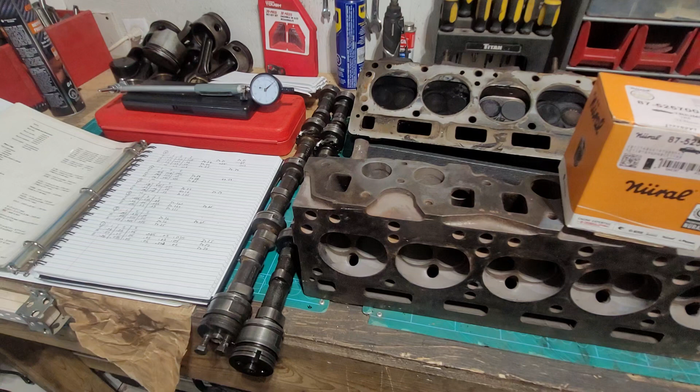Today's video: TR6 engine cylinder bore measuring theory. Yeah, that's a long one. Anyway, this is not one of the normal videos I do. This one is something to throw out there to the Triumph community, basically I'm looking for opinions.

Normally we measure the cylinders the same sort of way to see if it's out of shape and so on. However, what I'm doing now, I have an engine here that's been bugging me because it's at the cusp of being out of size. What doesn't help is that it was also stamped F and not AB.

So it's bugging me because it's pretty much out of size, but at the same time I'm thinking, is it or isn't it? I'm trying to get the exact number because obviously you don't want to machine if it doesn't need it. But don't get me wrong, it's always nice to machine it anyway, but it's a cost thing, let's face it.

Anyway, follow me with this and see what you think. Again, this is something to throw out there for opinions only, to see what people think. There's not a dig at anybody or saying anybody's doing it right or wrong or anything like that. Just make that perfectly clear.

So let's go through the process. I've done my calculations here, and I've actually done it in mil because I have both a mil and a metric gauge. That's how it's been wrecking my brain so much. I've been doing it in both, in metric and in mil, just to see would it end up being the same.

And it could be a little controversy to say. Anyway, let's look at what happens. Okay, so usually what we do, let me zoom in a bit. We take our measurements off a set number.

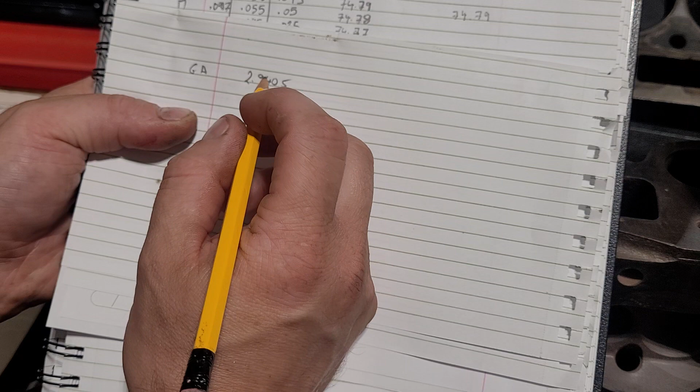And usually when we do a number, so what we'll do is, up here, this is a mil though. When we work out, we start with that, we set our dial gauge to that, and then anything on the dial gauge that's less, which means it's bigger in size, we write that down as discrepancies. When we get discrepancies, we see basically the taper and so on, where our measurements are.

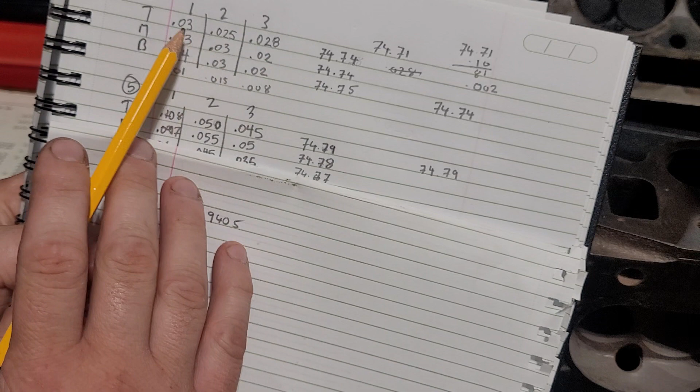I'm not going into all that. And then we find out, we add it all together, take the biggest size, and we basically get a cylinder size. Then we go back to this and compare to see if it's out of size. I mean, do we still have an apple or do we have a lemon?

Anyway, what we normally do is take that 0.1 mil, right? Now, again, there's nothing in the book that says that. So first of all, I'd like to know, even though we use this, who started this? Who started at 0.1 millimeter? It's unofficial in that way because it's not in the book.

Now, I'm not saying it's not in the book - I guarantee it is in the book, we just can't see it. Maybe it's in there but not clearly written.

And maybe it's just a case that when you get to a certain point, like if you think of it like your bearings, when you measure the journals and it gets to a certain point, you go up a journal, or you go up a bearing, but yet you don't machine the journal. Do you know what I mean? The gap has gotten bigger, you don't machine it, but yet you fill in the gap with a bigger bearing. So why are we not doing the same here?

And this is where my train of thought is going. So they say 0.1 mil is the tolerance, right? So based on inches it was 0.0038, but you could say 0.003 to be safe.

And you end up with 2.9443 - yeah, 8, 9, 10, 5. Oh sorry, 3.

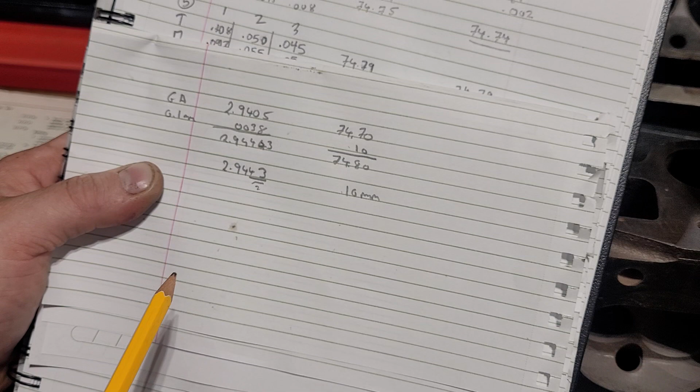Now here's where it started to change for me, is that I'm going to show you the book. Sorry, this pencil's driving me nuts because I need to sharpen it now. I don't have a sharpener here. Here's the book.

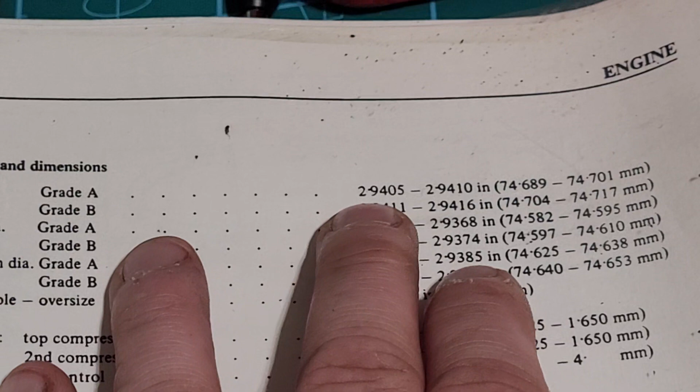Now follow me with this one. We're taking a number off this, 2.9405, right? Or 2.940, just to be sure. And that's the grade A bore piston, the bore size of the piston. If we take our engine, and we take our cylinder, we take our pistons out, and we measure this, and we go through all this process, and it's all within range, that's fine. Everything is going hunky-dory, doesn't need machined.

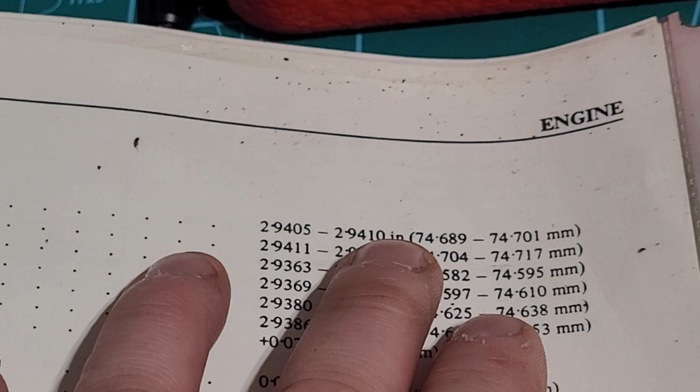So what do we do? We can either clean these up if they're right dimension and these are not worn, which theoretically, if this is within range, then that should be in range because one has to match the other, theoretically. So if these haven't been worn down, you'd expect them to be correct. However, what we can do is do this.

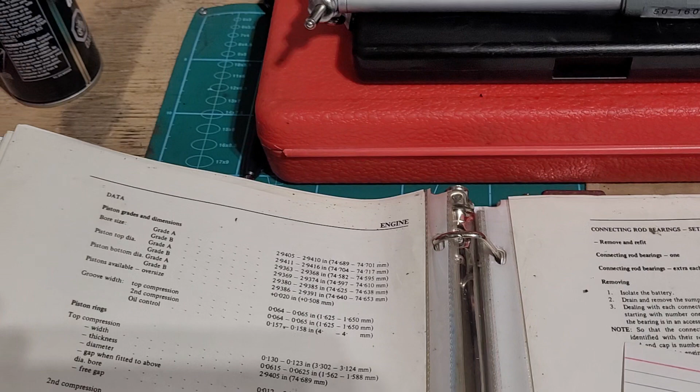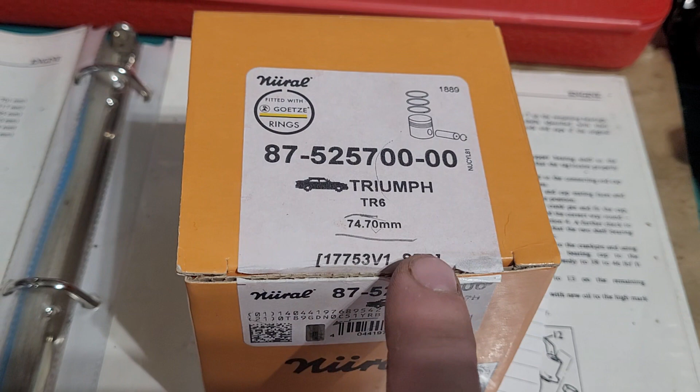We go out and buy a brand new piston. So this is a brand new piston head. As you can see, it's for a standard size, 74.70 mil standard size. All right, still straightforward? Yeah, okay.

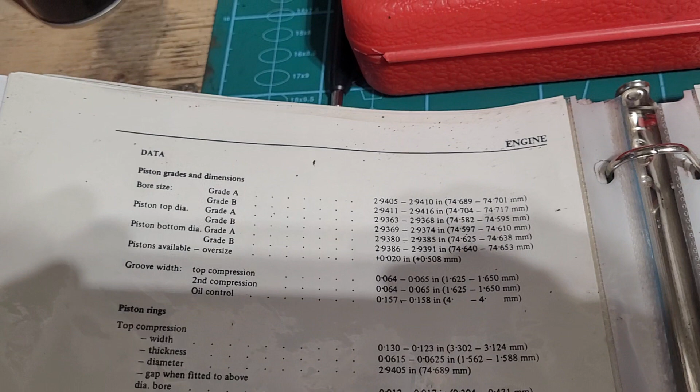Let's move on. Your engine has some grade B ones in there. As you can see, the difference is basically half a thou. So you have half a thou different size for the A, and you have a half a thou different size for the B. The difference between the two is 1/1000th of an inch.

So you take your B out, you measure it. But you measure it from what? Do you measure it from this number? Or are you measuring it from the A number? That's the question. If that was the case, you should be measuring it from this number for the B's to see if it's within tolerance. Let's say you did, let's say you took this number instead, 2.941 and not 2.940.

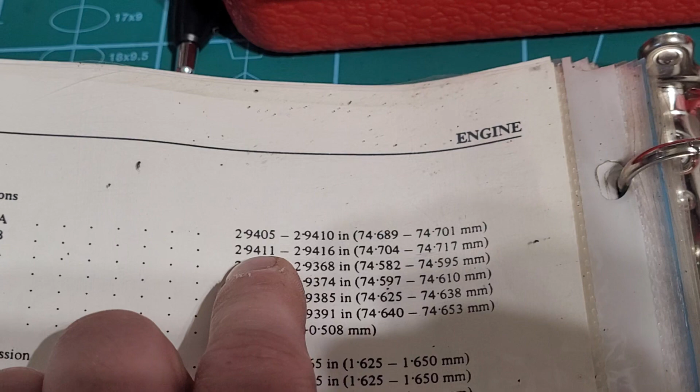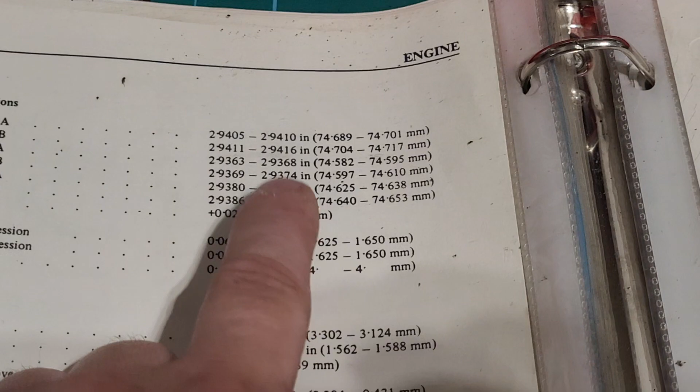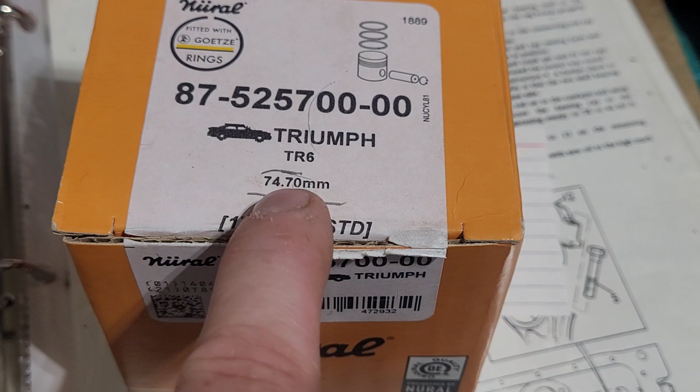And you measured it and you've done the same thing, calculations, and it was within tolerance. So you've done all your numbers, everything matched up. That's fine. You know what? I'll put new pistons in. What do you get? Hey, look, this looks the same. It's the same standard 74.7 mils piston for that. Same piston.

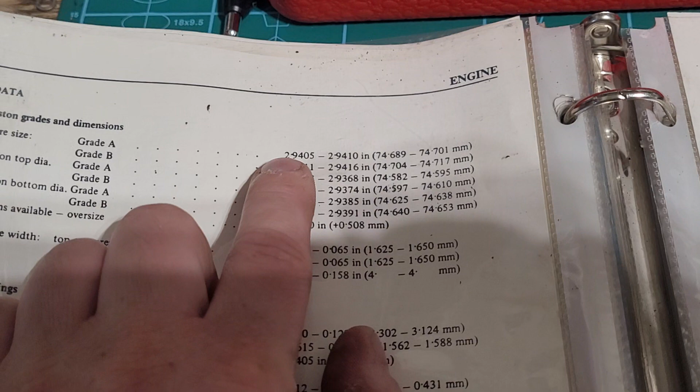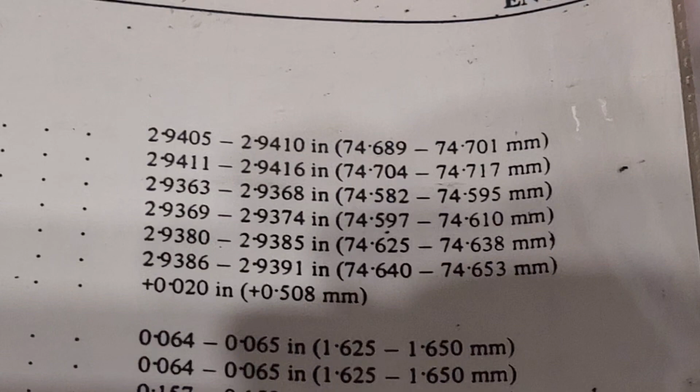Because they're different sizes, and this is what can confuse you, is that if you're using this number for grade B, how do you know this is out of range? Because you're starting off 1/1000th of an inch smaller already, theoretically. When I say theoretically, look at the numbers. This one, you have half a thou between sizes to make sure that this is how it's bored. Straight, no discrepancies, no oval shape, no nothing. This is how it's machined, so it should be perfectly cylindrical. Oh, thank God I said that word.

Between this and this, the same applies for this, between this one and this one. So perfectly cylindrical. So when you're looking for tolerance, or you're looking for wear and tear beyond the norm, what number do you go by? Do you go by the first number or the last number? And this is where I'm going with, is that we normally go by the first number. That's the smallest size. The largest size available for the B is pretty much 1 thou bigger, but yet there's no discrepancies in there. So why are we adding discrepancies onto this number?

For me, this is where I'm thinking, is that the cylinders, no matter which one you pick, they're still within range. So if you were to do your A's, and one of them was larger and out of range, you'd probably bore it. But yeah, for the B, the same cylinder, for the same piston you will put in it, if it's a standard, if you know what I'm saying.

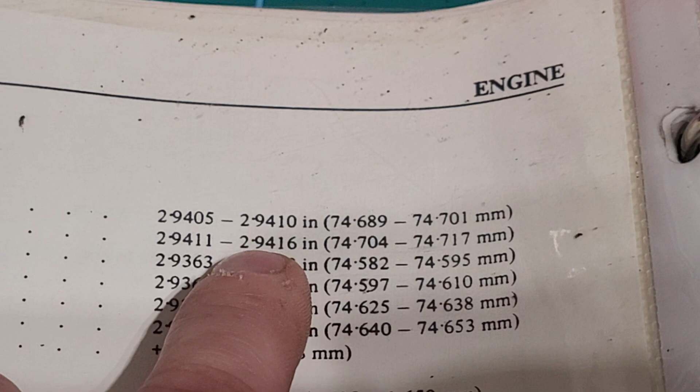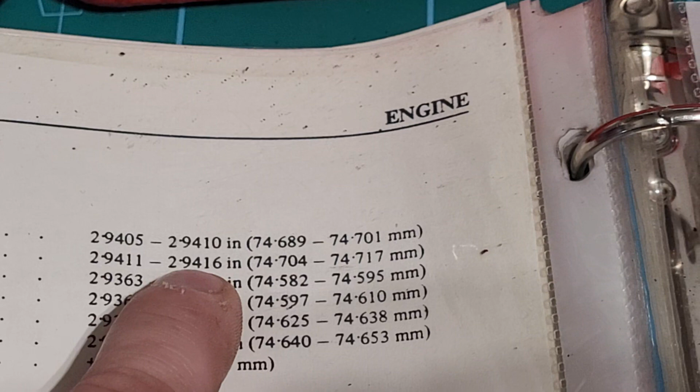So this could be out of range, but still be in range with this. And if it was in range with this, you wouldn't machine it, you'd put a standard piston in. So my train of thought is this: why are we using this number? By right, we should be using this number to start with, a 2.9416, basically 1 thou more. That should be our starting number, because we're using the same piston for both sizes now. You can't get an A and a B, or can you get an F, a G, or an H?

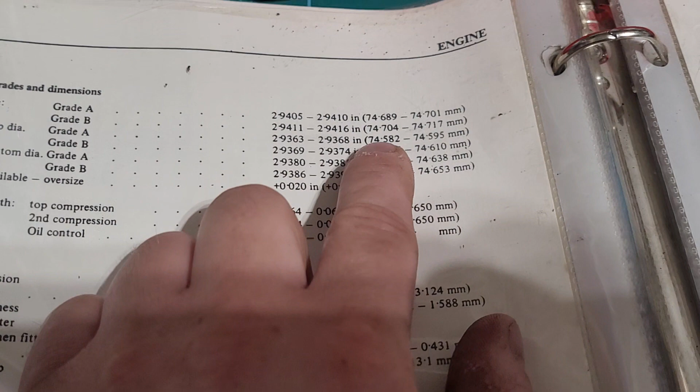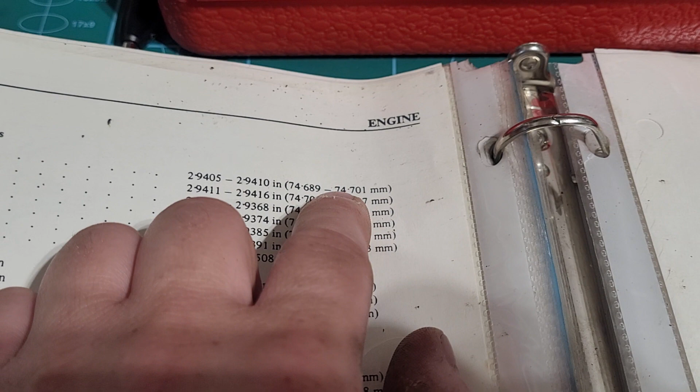You use the same, so the same rule I think should apply for the millimeters. Let me go back again. Same for the millimeters. If you look at it, if you want to do yours in mil, instead of starting off at 74.68 or 74.70, which I'd probably go 74.70 based on the thing. But if you look at it, it's designed for that. It's not giving you the lower number, it's giving you the larger number. But again, if you had this piston, the grade B, it doesn't say 74.71 on that piston, it says 74.70.

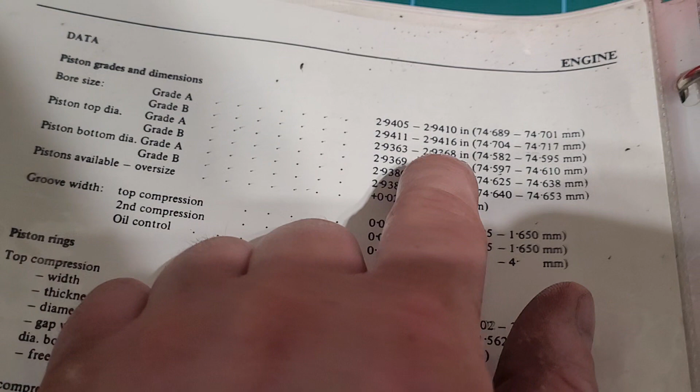So that's what I'm getting at, is how on earth can we measure the grade Bs and still put them in the same categories as the A when there's nearly a thou difference? That's what I'm getting at, and that thou difference is a difference of whether it gets bored or not.

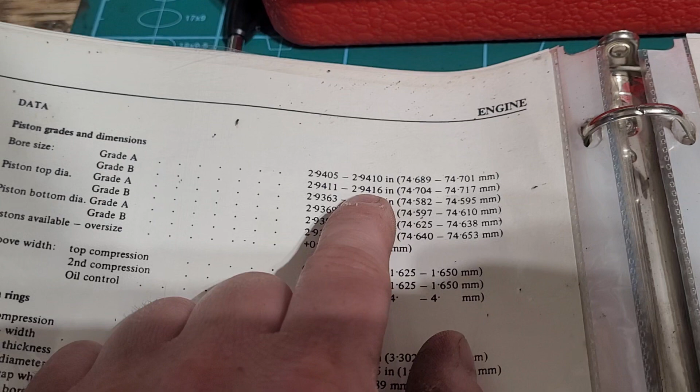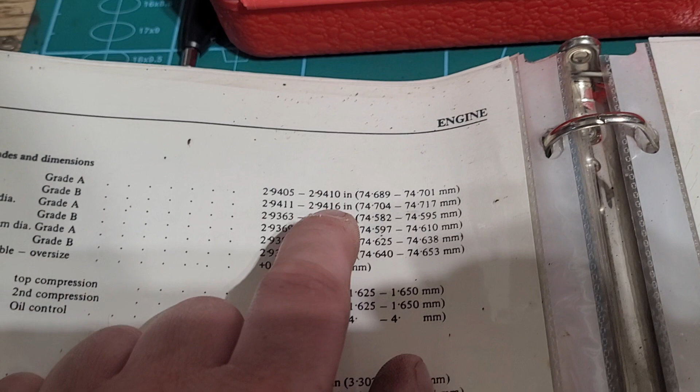So to me, and I'm starting to go this way, instead of using the 2.94, I'm going to start using the 2.9416, or the 2.9415 if you want to call it that, because I can get a 5 on the gauge, I can't get a 6, because I use the digital one. And I'm going to start with that one number, because that's the largest number available with no discrepancies and no wear and tear.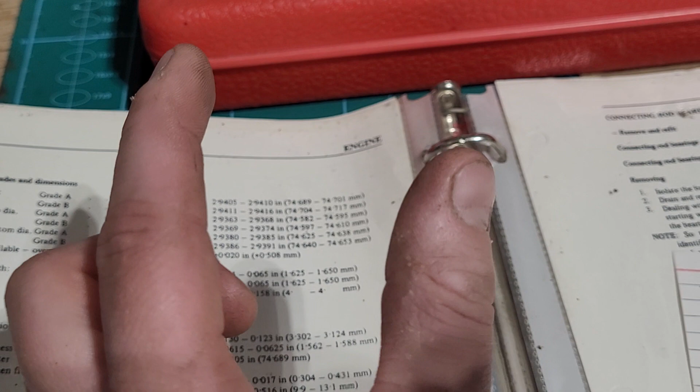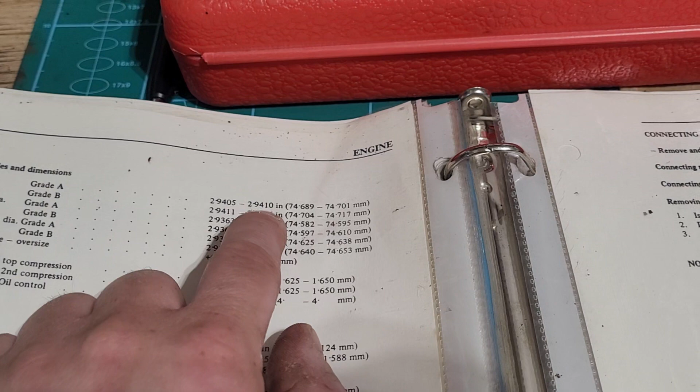Wear and tear, if you have something this size, it starts here and ends here. The wear and tear goes from the end point, not the beginning. That's the beginning, that's the smallest. You're adding in wear and tear into this, that's 1 thou mil, or 1 thou of an inch, your wear and tear that doesn't exist, yet you're adding it in there. And we've all done that, and I have done that. And that's where I'm going with this, is it possible that we're now wrong?

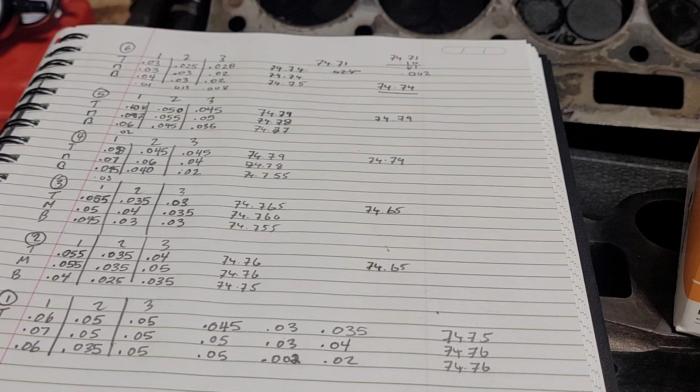Let me show you something else, right? I've got a piece of paper to do this, over here. So let's say we start off, right? We start off with our 2.940, then we add on our 0.0038 thousandth of an inch. No, because if you're not adding that 5, you're not adding that 8, simple as that, would you say? Otherwise you would, because the difference is you end up with 2.943. Well, in this case, if you added on your 5 and you added on your 8, let's say, for the calculation of it, you'd end up with 2.9443. So you've gone from 43 to 44, almost 44 and a half.

That's like, you could literally, to come up with that, you're literally adding half, in reality, half a thou onto this, right? So the maximum, if you want to call it that, is 45. So that gives you basically 5 thousandths of an inch, using that way. Now, that's only going by this 0.1 mil discrepancy.

Since it's not in the book, and I said I've looked through the book and I can't find it. Now when I say I can't find it, I haven't read this thing like a book, I'm terrible for taking information out of books in that way. If somebody actually read it, I guarantee. But who came up with this number? Who? It's not in the book, so somebody had to assemble it. Is it in a different book? Is it in a Haynes book? Is it in a different manual? Like, where did this come from?

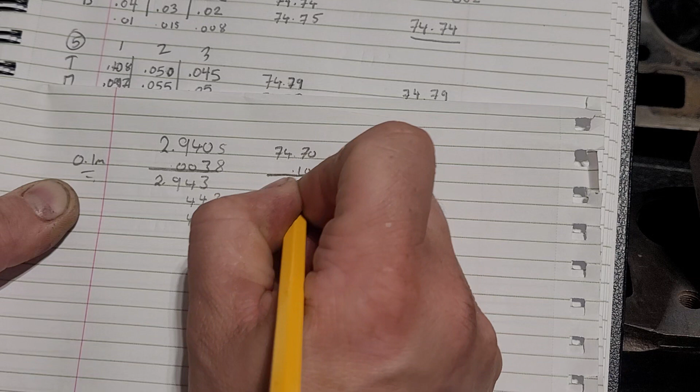This is why, because I want to go into something else and you may explain this. Let's say even we did use this number, that's fine. In mil, you do the same. You do your 74.70, which is based on the piston. I'm going by this number, because that's what it's designed for. And then you add on your 0.10, and you end up with 74.80. Seems pretty straightforward, so anything beyond your 0.10 is out of sync.

So there's your out of sync, and in this case your out of sync is this number. It's actually, well, it's 43, but you could say half, 5 thousandths of an inch, because you've gone from 0.0 to 0.5. So I'd say half a thou, 5 thousandths of an inch, so 0.005.

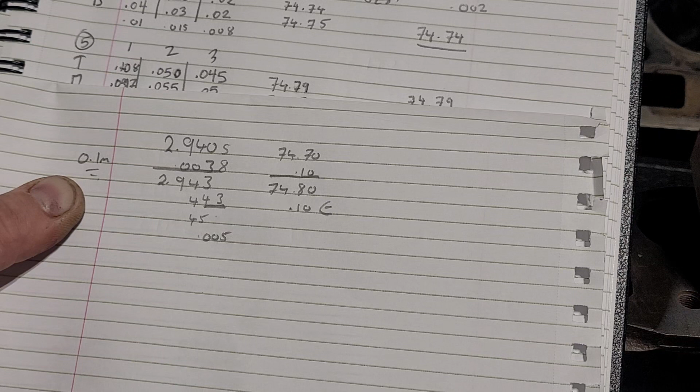Would anyone agree with me on that? Maybe, that's going up a small piece. In reality, it would probably be 0.004, so 4 thousandths of an inch. Anyway, you can see where this is with the numbers, how it goes.

Now what if, though? Once you go beyond that tolerance, it needs to get machined. And you need to go up by 0.020 — 20 thou you need to go up by.

My question is, why is it 20 thou? Why not 10? Yes, you can't get — there's no 10 thou pistons or rings out there. Why? Why is there not? This is where we have to think about it. Somebody else said this, and it never dawned on me when I thought about it — why is there no 10 thou? Why does everything else, like the bearings, start like TR6 at 10?

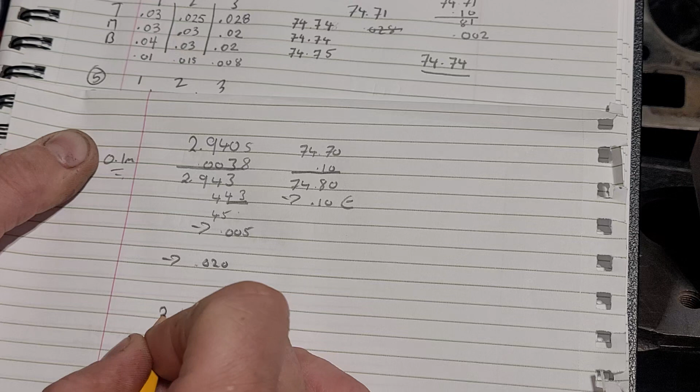So why did these not? Why did these start at 20? Why do you have to go up 20? So I know if you rebore it, you base it off the 2.940, and you'd end up with 960 — sorry, the pencil's terrible.

2.960, but again that's your starting number. So where's the end number? Is the end number — if that was the case, where's your tolerance in here? Where do you get your number before tolerance? Is it 2.96? It should be 2.9605, that's what it would be.

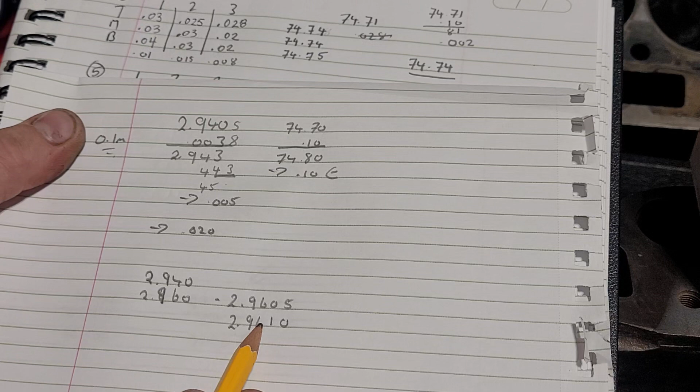Is it 2.9610? Is that the new number you're going for all the pistons? Because that's based on the standard size, which theoretically would be correct. So again, agree with me if you're not — based on boring it, that's where you start, and then they'd all end up the same. There you go. And then, to me, if you'd done that, you'd add a tolerance onto this number, because that's the larger number that's acceptable without any discrepancies.

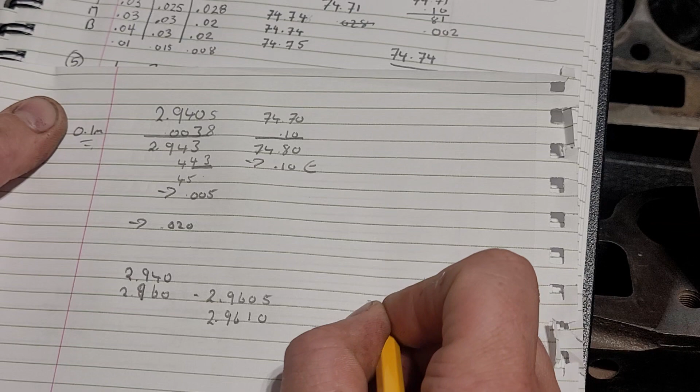However, based on the machine you already have, it includes the grade B. And the grade B goes all the way up to 2.9416. So right now your engine can go this high, this wide, without having any wear and tear. That's how it was machined.

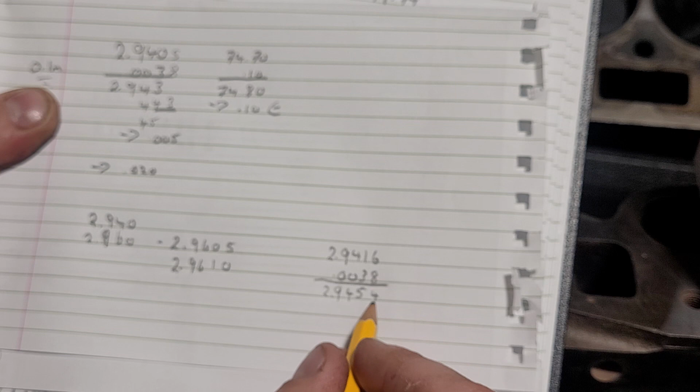So if you add on to that your 0.003 — let's say you're at 0.0038 — you now end up with a number: 2.9454. So it's almost reverse of this one. So now you have pretty much 5.5, your 0.0055 discrepancy. And the reason why this number is a little important is, I know one of Ellen's videos...

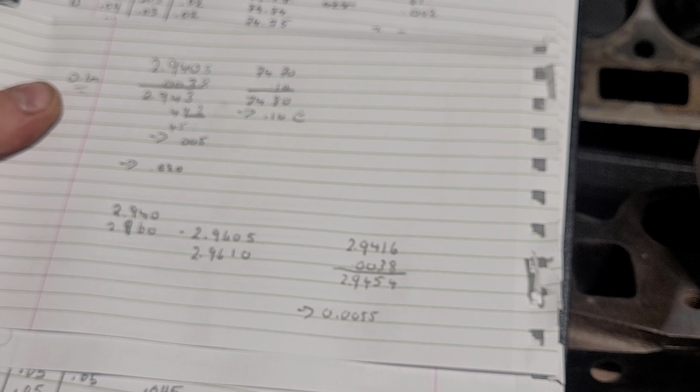On one of his videos, he was doing the machine — it's offhand, I'm trying to think of it — he ended up at like 44. And he's like, 'Oh no, that's out of range, so it has to get machined.' But according to the numbers, if you use it for both A and B — now again, someone might say, well, okay, there were no B's in it, it was all A's.

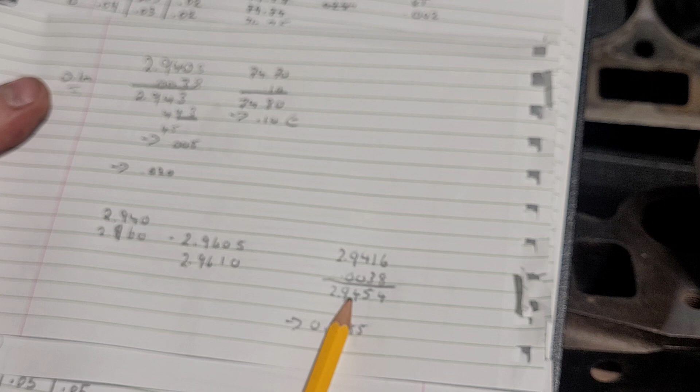That's fine, absolutely fine. But what happens if there's only one B? Once there's one B in it, you have to use this number, because you're going to treat them all the same. This one's going to go into the same one if they're all in range. So you're either going to calculate the B wrong, or you're treating them all the same — you're either calculating this wrong, or they all have to be calculated from that, because the same piston's going into them all. Does that make any sense?

Sorry, it was blurry there. So that's where I'm going with this. Now you do the same with millimeters, so in reality this should be your number. It keeps going out, I don't know why — it will focus. The same for the millimeter.

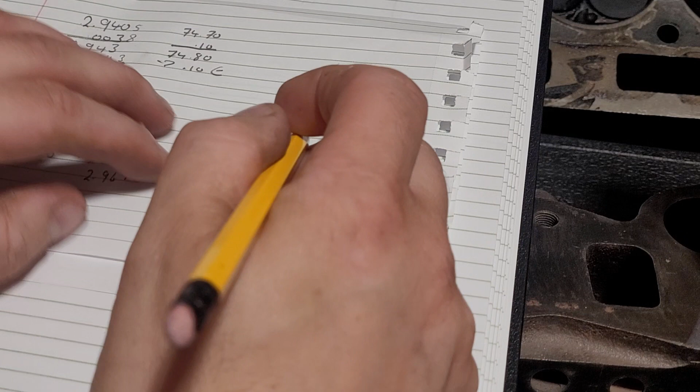74.17. Yeah, I might have to zoom in a bit more so you can see it. 74.17. You add on your 0.10, and now you have

74.27. That should be your size. And when I done mine... sorry, 74, sorry, I wrote the wrong number. My mistake. I was wondering there for a second. Let me do that again.

The millimeters is 74.717. Now I don't know about you, but I can't get that 7 on. If I do millimeters on the gauge, the dial gauge, I can't get that one, or the micrometer, the electronic one. I can't get that. Now you'd probably be able to get that on one of these styles. Hang on, hold on.

I use this one, sorry, it's really close, that's how I use this. I use this one and I put it in inches because I get more numbers and I get a bit more closer. Otherwise I lose the last number.

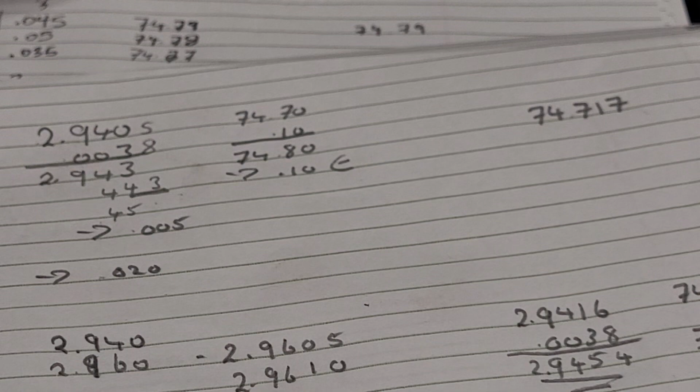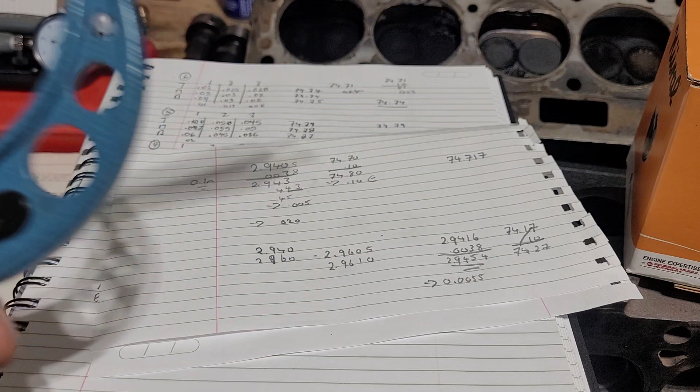I'm pretty sure if you had a millimeter one of these gauges, you'd be able to get it no problem. I'm still trying to figure out how to get these fine-tuned, I'm not going to lie. I'm still trying to work that, especially for measurements. It's one thing moving it to measure in, but I find it hard to go measure out. So yeah, not gonna lie, I'm still figuring that one out. That's why I like the electronic.

Anyway, so we're gonna go with 74.71, let's say. Let's take that out, and we add on our 0.10. Then we end up with 74.81. Now if I didn't do that, I end up with 74.80. So that's 0.01 millimeters.

There should be, well no, you have a 0.1 discrepancy. Sorry. So if you have 74.7 and you have 74.71, yeah, it's an extra 1 mil.

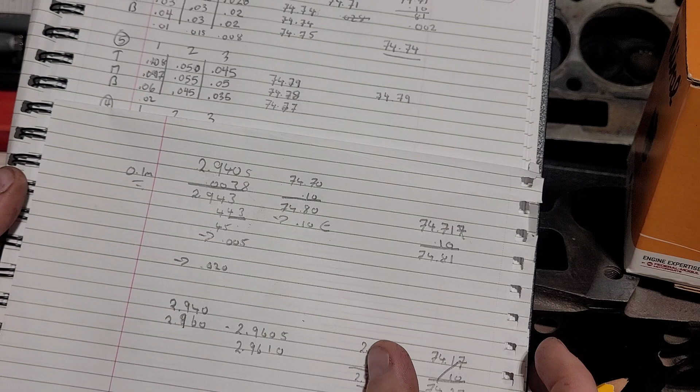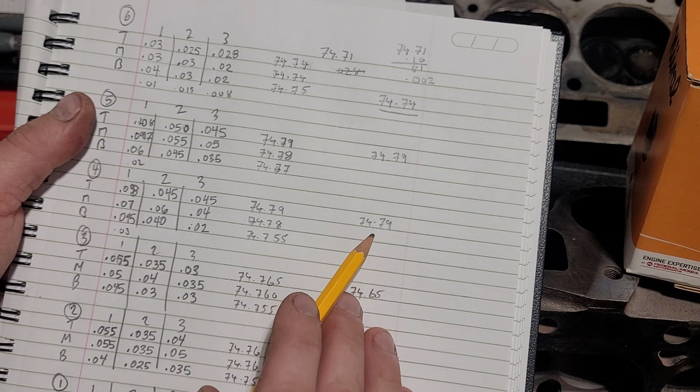So here's the thing, is that when I was doing it, you have 74.8. When I was doing mine, I ended up with 74.79. Look at this one, 74.79. So this is 6.54. These are the ones, these two, this was the one that was terrible, this one. But this one is just as bad.

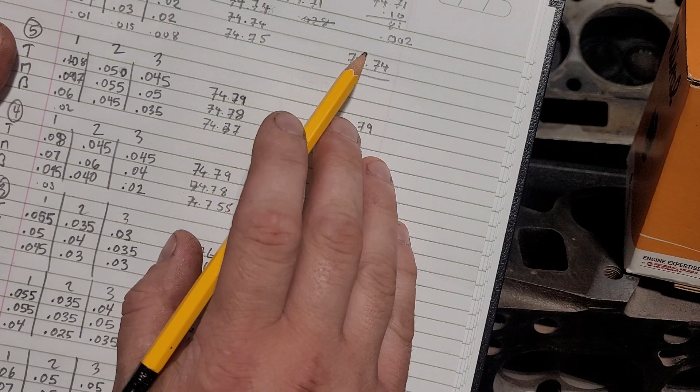And obviously you come down a bit, you have 6. So they're not the worst difference in the way of themselves, but obviously 4 and 5 on pretty much every TR6 engine takes the brunt on everything. It's always 4 that's fouling. Always that one. I don't know why.

Just seems to be. But yeah, so based on that number, and I use my numbers here, I'm within range. I don't have to machine it. But yeah, if I went and used this number, and I've done it in inches, I was out of range. So that's the difference, is that theoretically I'm going to go by the later numbers because tolerance happens after.

And the other one, here's the other thing I was getting at, is I was talking about the difference of why you have to go 20 tel. Why do you have to do that? Why not 10? Here's my theory, and again the theory is that there has to be a point where 10 tel is in here somewhere.

So my theory on this is that like a bearing, the tolerance level is based on your bearing size. If you think of a bearing, if you go and you're, let's say, 10 tel out or 8 tel out, you'd go up to a 10 and oversize, if you know what I mean. Like once you reach beyond the limit of a bearing, you go the next size up.

That seems pretty plausible. That's what we do. We measure to see how big the gap is, and we fill the gap. With this, is where do we put that 10 tel? Do we add it to here?

So theoretically we go from 2.940, and do we add the 10 tel so it's a 2.950? Is that where we're going with this? Because when I done this one, it was 4.5, and it's like 5 tel, well 5.5 actually. It's even bigger again. Or do you add 10 tel onto the later number?

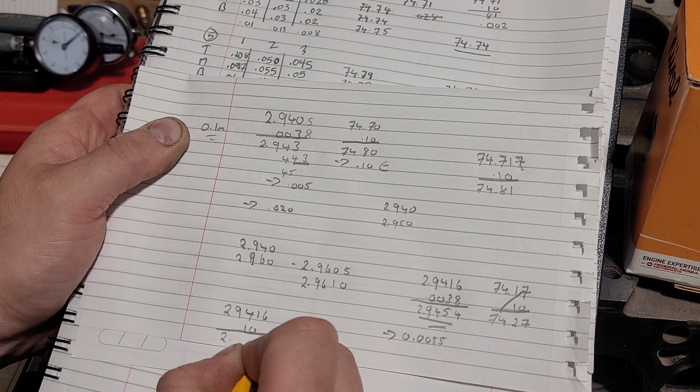And you end up with 2.9516. So would you think this number here is your tolerance? Because you know you've gone 10 tel, and after that, theoretically, it should be 20. You've gone beyond the 10, so you have to machine it.

So I don't know, it's that whole question of at what point do we go to 20. The only reason I say 10, and you're probably wondering where I'm getting this 10 tel from, there's no 10 tel. I can't get these plus 10.

That's right. The reason why is that if my brain is thinking like a bearing, when you get to a certain point, you go to the next size up. When you get to that point, you go to the next size up. There has to be a point where you go from 10 to 20. That's why you're machining at 20. Why not machine at 10? Why is 10 not available? So there has to be 10 thou somewhere in these numbers.

That's the only logical thing I can think of, that there's a 10 thou discrepancy somewhere. So that's why you go up by 20. And then from there, because you've gone up and remachined it, it goes up in intervals of 10 again, because you've already reset them all.

The reason why I say this is because you're looking at two different sizes, an A and a B, not just one size. If it was one size, I wouldn't bother trying to figure out why the 10 thou is not in there. I'm thinking the 10 thou is the difference between the smallest point of the A, the largest point of the B, plus any wear and tear.

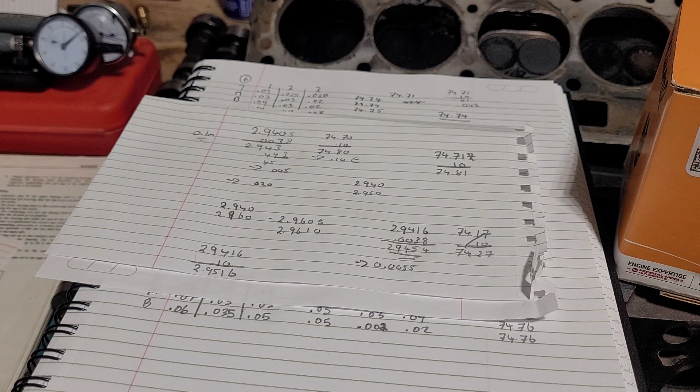So I don't know, maybe I'm completely wrong with this, maybe I'm stirring the pot. But I hope you get where I'm thinking with this, is like, where did these numbers go?

Like I said, this is an unofficial number, that 1 mil. Who came up with it? Where did it start from? Was it somebody who worked in the shop and said, well, they don't do it this way? That's their tolerance, compared to a modern car now, which gives you a tolerance number, but in reality it's a lot bigger.

That's their safe number. So it'd be nice to have something defined, something written, that says if you go beyond this tolerance, it's no good. I suppose maybe some engineers would say that's enough tolerance, beyond that you're not getting the same efficiency, so it's best to machine it or whatever, for any engine, which is fine.

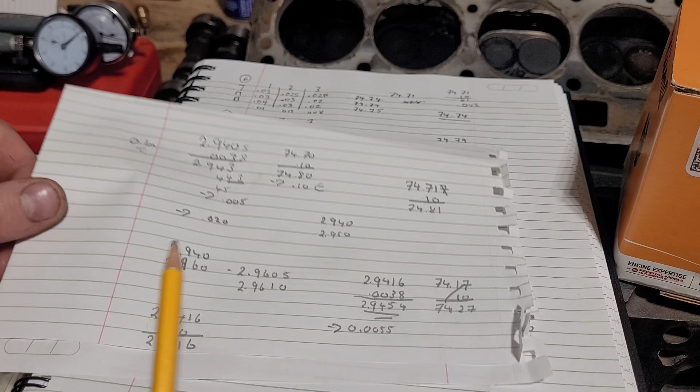I credit that, I get that. You want a nice running, the best engine you can get, especially if you're throwing money at it. So I get that point. But it'd be nice to know where, because look at all these numbers, where are we in this whole jib-jab of numbers? What's defined?

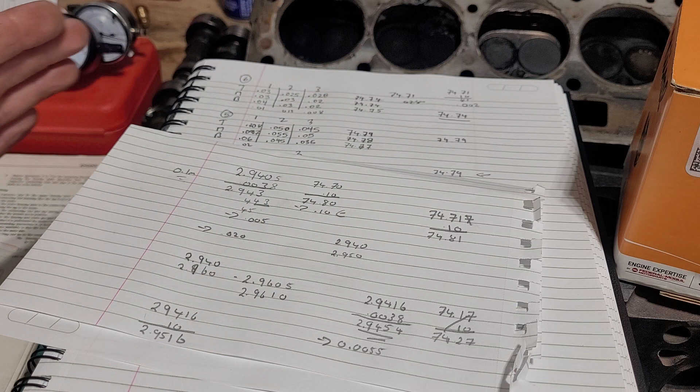I'm willing to think, like I said, if you add a 10 thou difference, you can go beyond it, because the rest of them go in 10 thou, like from 20 to 30 to 40, 50, 60. So there has to be 10 somewhere in here, and I think that's adding on. So you're basically giving a 5 thou difference between A and a 5 thou B, and you end up with 10. Oh no, maybe I'm getting completely lost in my own head here with numbers.

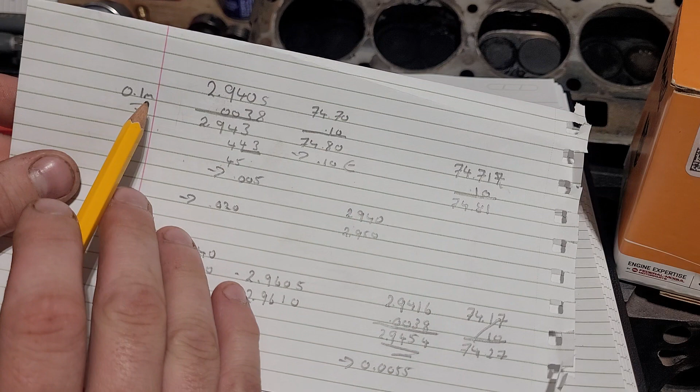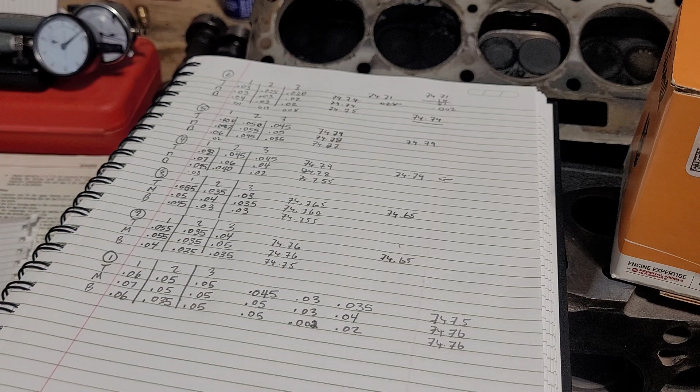But for me, I'm going to stick with that 0.1 millimeter, I'll add it to the largest of the millimeters, and I'll end up with 74.81. So according to me, when I've done mine, these are all within range. But if I'd done it based on the first one, they wouldn't be. So that's my train of thought.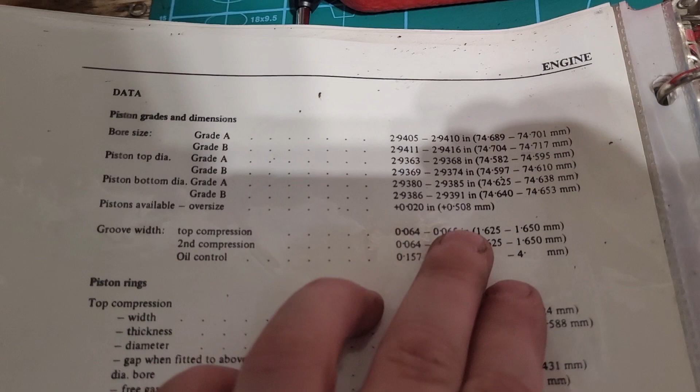So it says, let me know what you think. And it says, there it is there, oversized starts at 20 thou. I mean, you have to machine it to that. And I get using this number, because the next size up should be written on the box what size it is, and that's fine, I get that. But for this, in the sense of measuring our D's in range, we have to bear in mind there's grade B's in there. And what if you don't know there's a grade B?

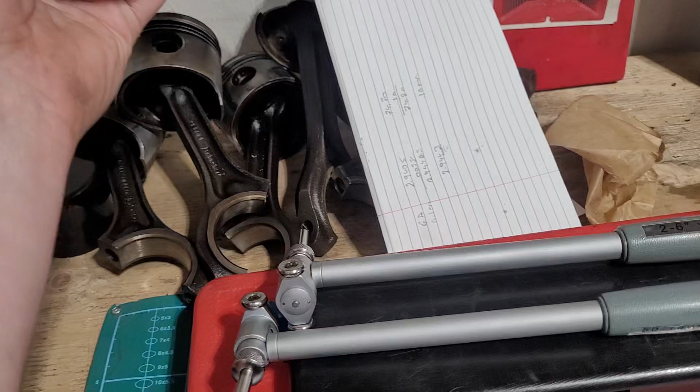How would you know? You could turn around and get your piston, and let me show you on this one, hopefully it is there. This, as you can see, is stamped F. It's really early.

So you could have a G or an H as a B. But what if your piston could be stamped with, let's say, an A, for argument's sake. But the actual block...

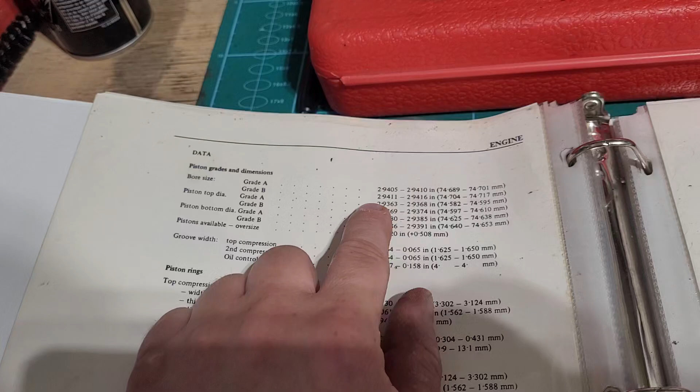If you've seen my other videos, the early models have each cylinder stamped. I don't know if you can see this, hopefully you can. You can just barely make out an F. Hang on, I'll see if one of these is clearer. Maybe this one.

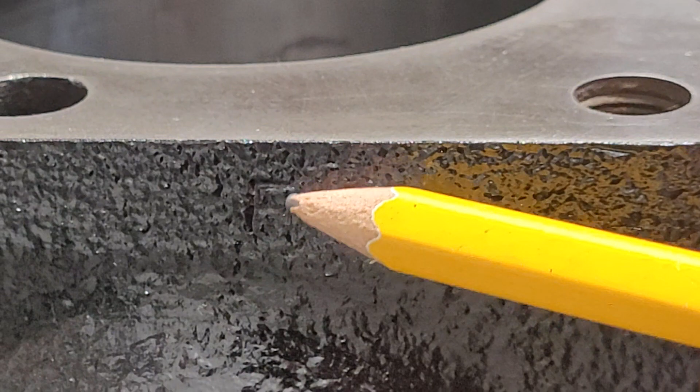Where's the cylinder? Can you see the F here? I don't know if you can see it. This one seems to be the clearest, I think. Where is it? Right here, see the F? There it is, that's stamped F.

With the early models, that's stamped all the way down. So you'd have A, maybe a B, A. The later models have a 3 here and a 3 here. So if you don't see that, how do you know what you're measuring?

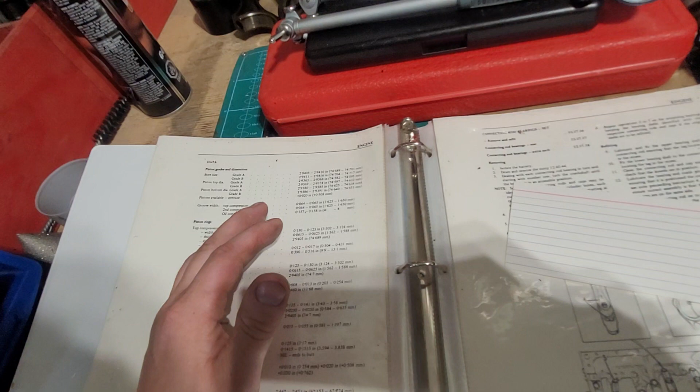That's the whole idea, like I've done before, of eliminating the possibility of discrepancies. How do you know which cylinder it actually was? Was it an A or a B? Just because the piston says A, that doesn't mean somebody didn't put an A back in at some point over the last 50 years without knowing.

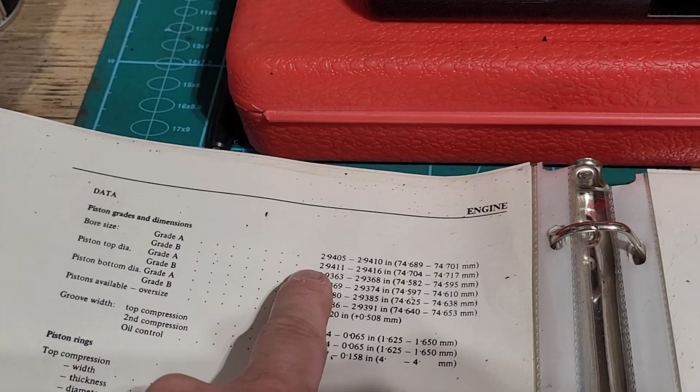So if we don't know for sure what size it is, whether it's an A or a B, and it's within range, and we replace them with new ones, I'm telling you now, that's where I'm going - I think we have to use the last number, the 2.9416 or the 74.71 mil. That's where I'm going with this.

So again, I'm going to throw it out there. Let me know what you think, let me know your thoughts on it. Again, this isn't a big grudge match to say this is right and everybody's wrong. That's not it at all. I just want to see if anybody agrees with me where I'm going with this. Maybe somebody already does it this way, maybe somebody doesn't. Does it have any weight to it?

But you can see the logic where I'm getting at, and I hope you see it that way too. Again, it's your choice - if you want to measure it using this method and it goes out and you want to bore it, by all means. It's not that at all. It's just a case of trying to find the right way - maybe there are machines or blocks being bored when they don't have to be.

Nothing's getting cheap nowadays, so maybe there's a possibility it's just cutting that cost down. Maybe we're skipping something, I don't know. It's a choice - like I said, if I had the money, I'd machine them all anyway, just for the sake of having that better compression and so on.